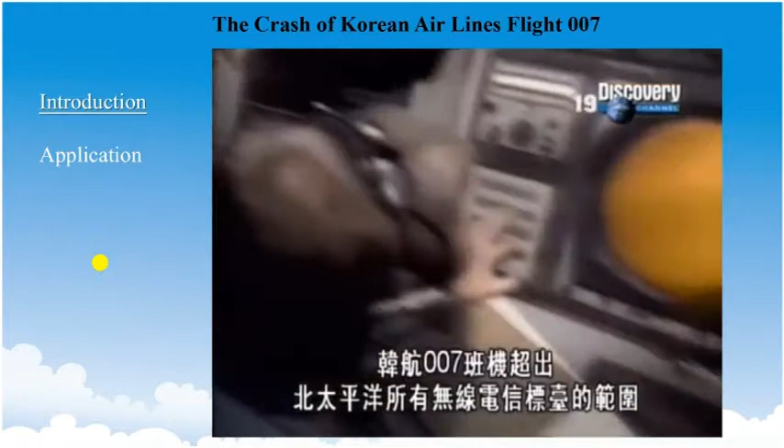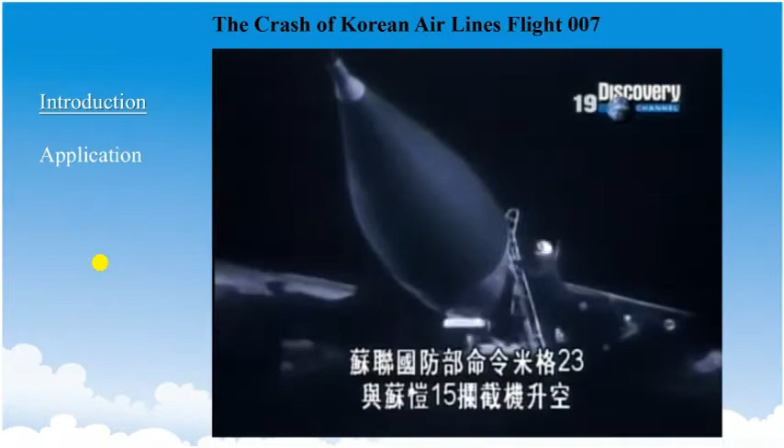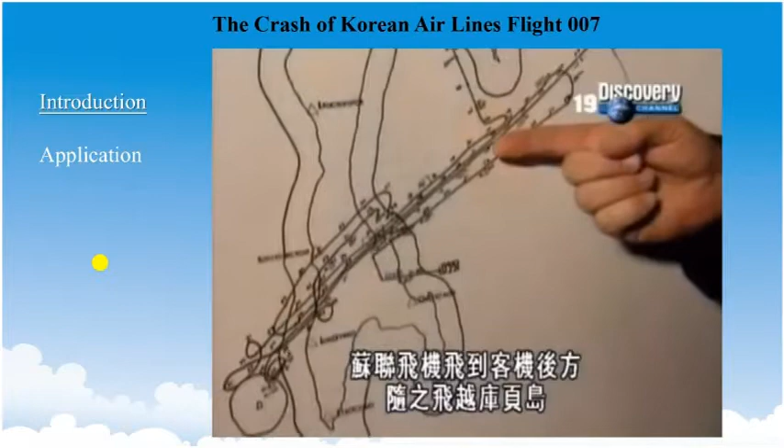So I think the video is quite clear to understand. Maybe it is the end of the presentation. Thank you. No, I'm just kidding. I will start to tell you the whole process of the event.

This event happened during the Cold War. We know that there existed a weird phenomenon between the Soviet Union and the USA at that time, which is the reason that caused this tragedy. In 1983, Korean aircraft 007 was on its way from New York to Seoul, but it deviated from the original scheduled route. When it flew through Soviet airspace, the Soviet Air Force considered it a spy plane from the USA.

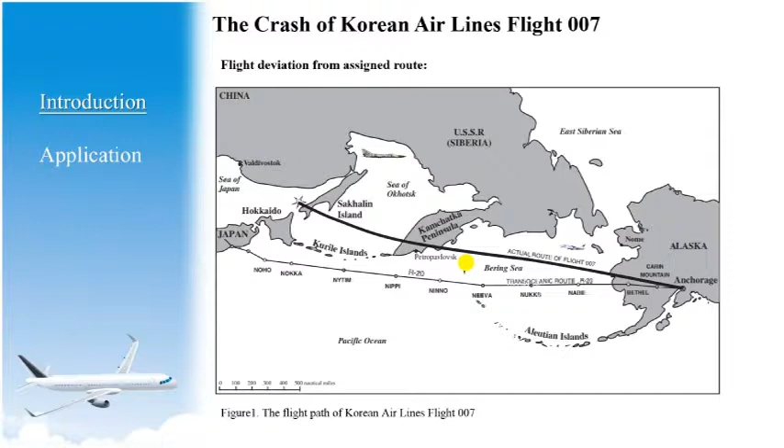So they tried to warn the Korean plane and check its identity, because they wanted to make sure whether the plane belonged to the USA or not. But the Air Force didn't get any response from the Korean plane at that time. Finally, they confirmed it was a spy plane and shot it down.

From the video and the picture just mentioned, we can know that the plane deviated from the original route by more than 7.5 miles. For precise numbers, it deviated from a 220 degrees southwest direction to 245 degrees, which caused it to fly through Soviet airspace.

So why didn't they notice this big problem? We know that every plane is equipped with an inertial navigation system. What's the main reason that caused this tragedy?

The inertial navigation system is a high precision system, including 3 separate computers connected to a precision gyro stabilization platform. Each movement of the aircraft is sensed by a gyro, and each of the 3 computers calculates separately, then corresponds to the change in latitude and longitude. These 3 computers constantly check against each other to ensure that their calculations are consistent, so the system provides a correction function and accurately locates the actual position.

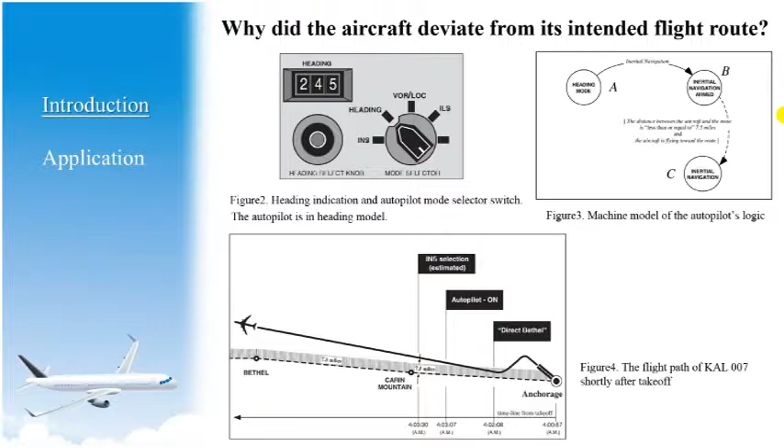It means it's already too late. So the first condition is wrong. It may cause calculation errors.

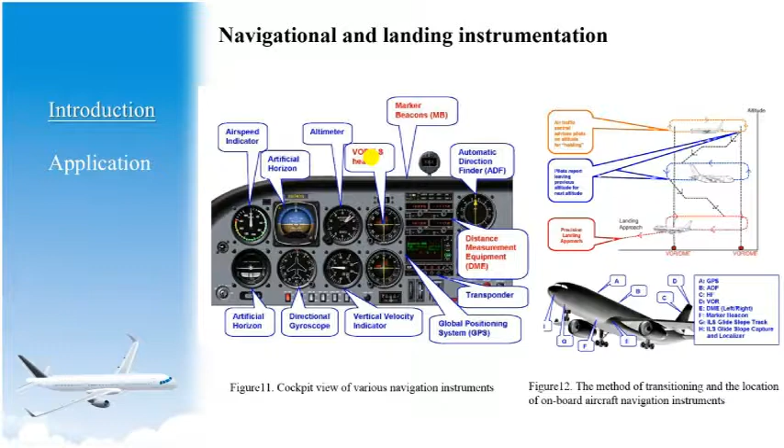It's really complex. And how about the inertial navigation system? I think everybody knows this very well - it provides the pilot with precision navigation data referenced to latitude and longitude.

Accelerometers and gyros will calculate the linear degrees of freedom and velocities, measuring the movement in the 3 rotational degrees of freedom to form the inertial navigation system. There are 3 linear degrees of freedom, like X, Y, and Z, to specify positions.

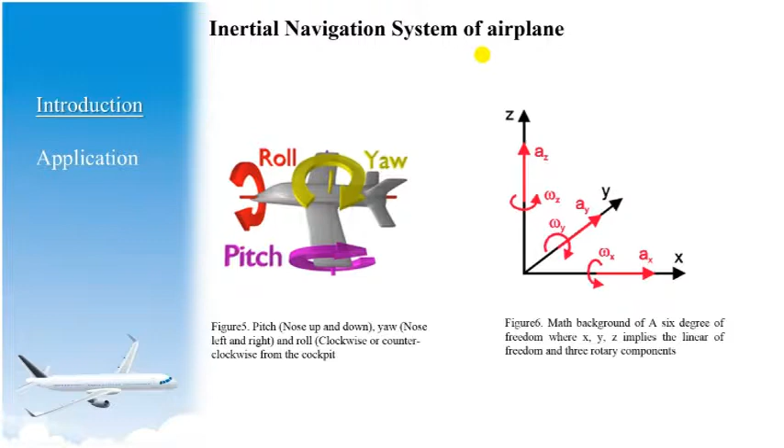There are 3 angular degrees of freedom - pitch, yaw, and roll - to measure the attitude, at different angles.

In the inertial navigation system, you use a gyroscope rotating at high speed, because the gyroscope has large inertia and is not easily changed by the movement of the aircraft. We know that when the aircraft is flying, there may be some big movements that affect the position result. You can imagine it as the same as a reference point in space, and then calculate the current position of the aircraft.

It is also an autonomous system that does not require operating ground stations. So that's the special feature of it.

Let's talk about the INS. We know the INS consists of the IMU and instruments, both electronics and navigation computers, to calculate gravitations and accelerations. The IMU typically contains 3 orthogonal ring laser gyroscopes and 3 orthogonal accelerometers to measure angular velocity and linear accelerations respectively. These computers also integrate the net acceleration to maintain an estimate of the airplane's position.

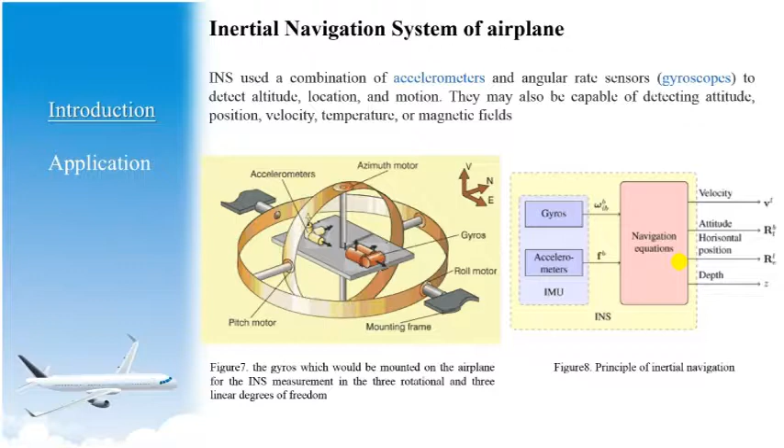The next part is about the sensors. As we can see, there are 2 different sensors: one is the accelerometer, and the other is the ring laser gyroscope.

The accelerometer can detect the magnitude and direction of proper acceleration as a vector quantity, and it can also be used to sense orientation because of the direction of weight change. However, the other one, the RLG, consists of a ring laser having 2 independent counter-propagating resonant modes over the same path.

So the difference in frequencies is used to detect the rotation. They mainly focus on different aspects.

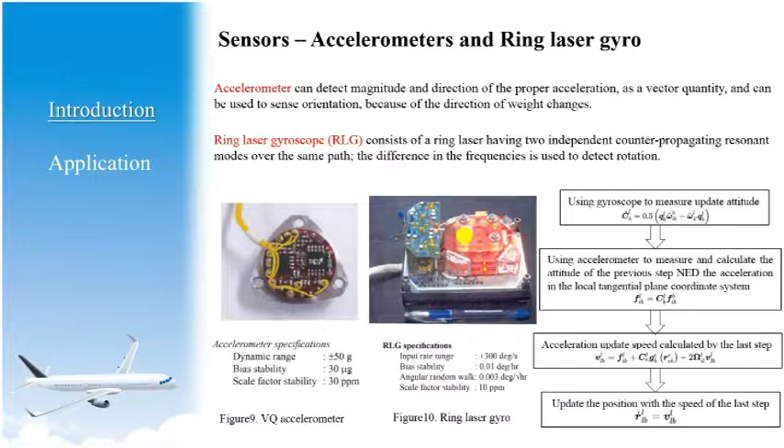So then we use the acceleration to update the velocity from the previous step to get the attitude, speed, and position of the aircraft.

This is why the very high frequency method is used for positioning, which can avoid obstacles on the ground or other signal interference.

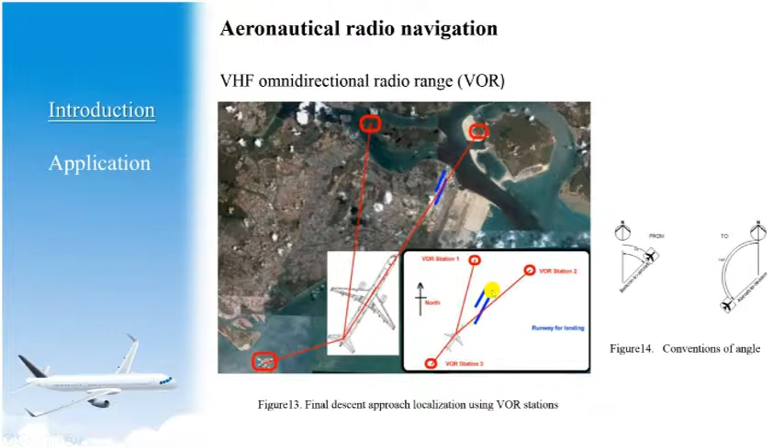For the final part of the introduction, the ILS is the landing system. It's easy to understand: the ILS sends radio signals and evaluates the aircraft's heading, speed, and ground altitude to determine a better landing route, returning this information to the pilots so they know the details and achieve better landing performance.

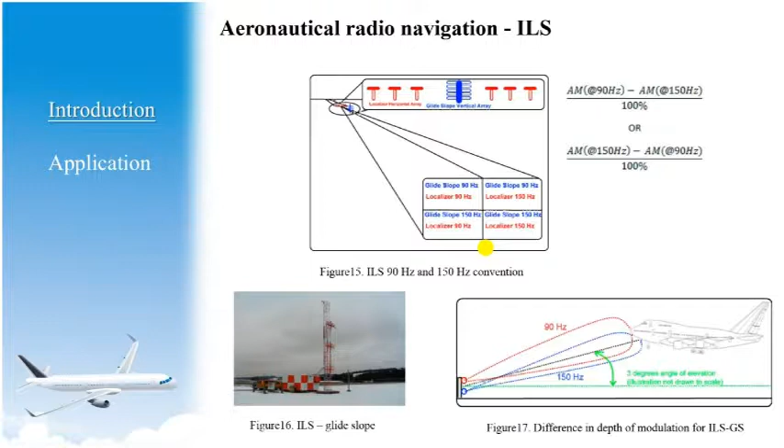Applications. In this part, we introduce the INS systems applied on the aircraft through virtual flight. We divided our application into 3 main parts. The first part introduces what the air crew need to do or focus on when the aircraft is taking off.

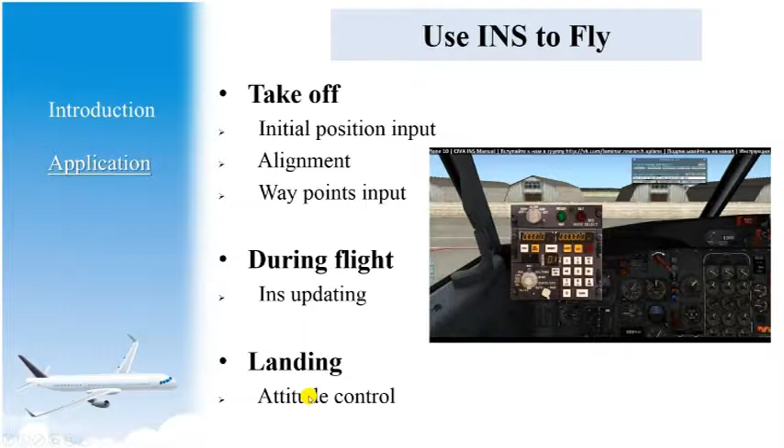The second part covers when the aircraft is during flight, they may face problems or be affected by environmental factors, so what should they do. In the final part, we introduce the landing, and the tips they need to focus on or care about.

The first one, initial position input. Before taking off, the first step is to input the initial position in order to start the INS systems. Just like when you're playing a game, there is a start point in the game—it's the same meaning. So it's a very important part before flying; you have to set the initial position input.

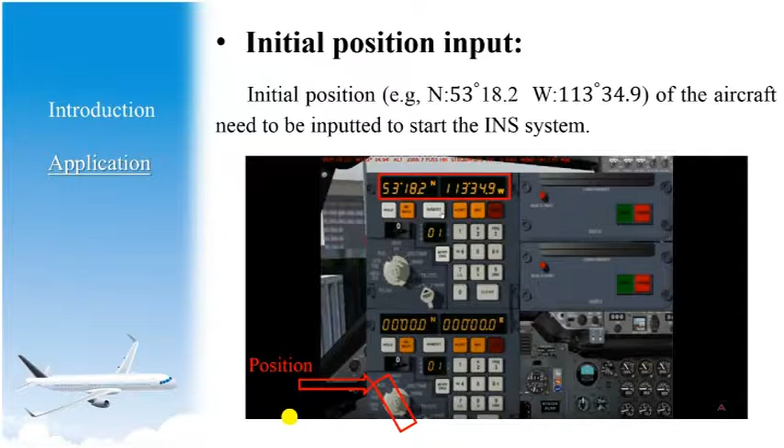Alignment. This function is just to make sure there's a relationship between the INS body frame and the local level. Also, you have to be sure that all of the engines are off.

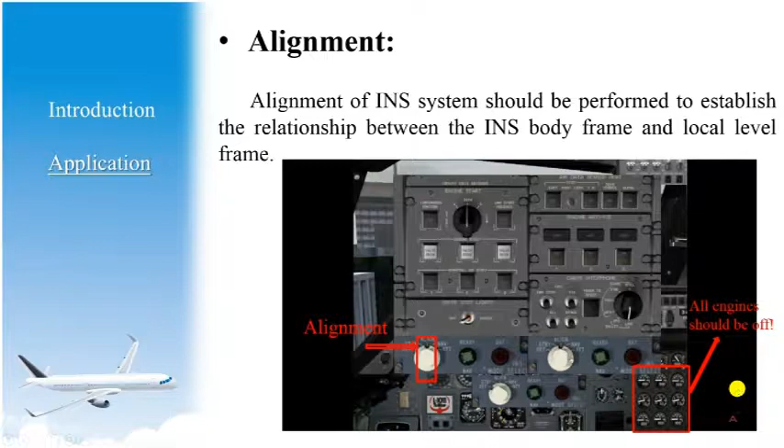Alignment performance index. This is usually used to evaluate the alignment results of the INS before taking off. The range of the performance index is from 0 to 9. We can imagine the performance index like the error of the alignment—a higher number means lower accuracy, and a lower number means higher accuracy.

As shown in the picture, there are 2 numbers: the left one means the PI index is 9 at that moment, and the other side is 5, meaning the required PI. When the left one decreases to 5 or under—maybe 4, 3, 2, 1—it means we can do the next step before taking off.

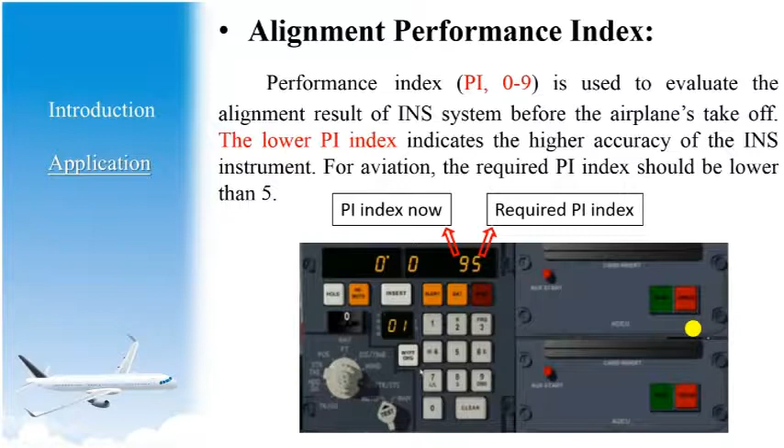Final step before taking off: waypoint input. After doing the alignment performance index, the final step is waypoint input. The aircrew need to input the longitude and latitude of the destination, just like setting a course, a goal that we have to reach.

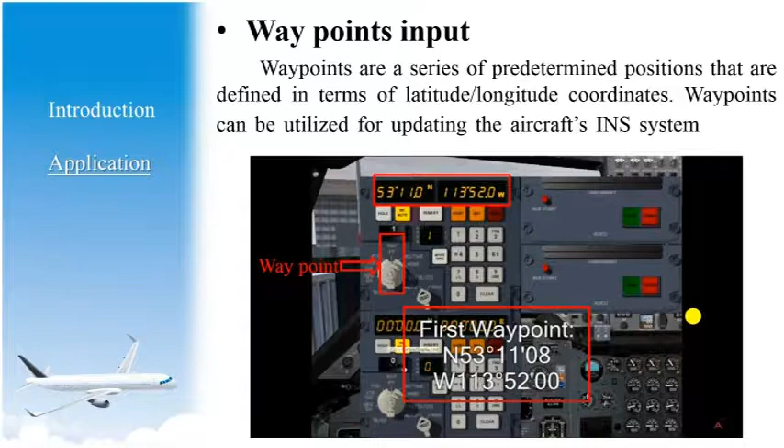This is also an important part during the flight—why it's important, I'll tell you later. INS updating: when they are flying in the sky, they may face problems, like the PI index increasing during the flight, possibly affected by environmental factors or other factors.

So what should they do in this moment? The aircrew need to predetermine the waypoint to the INS systems to make sure they are on the right track. As we can see in the pictures, the number increases at that time, then they do the INS updating, and finally the number decreases. This is something they have to do or notice during the flight.

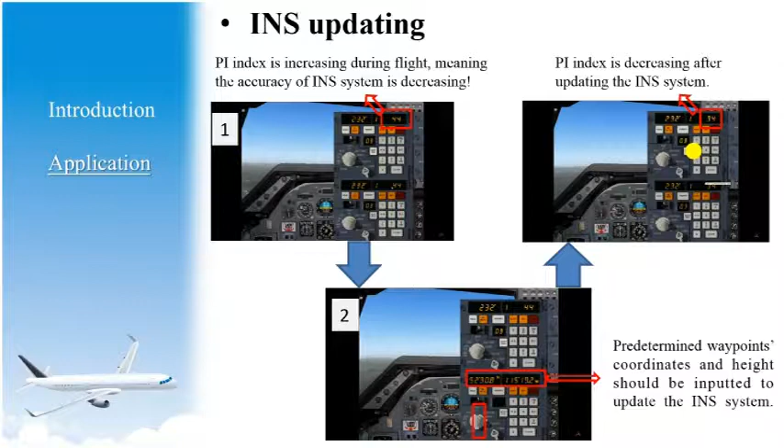Finally, altitude control. This is the final and also important part for the aircrew, because actually many historical crashes happened in these sections. The main reason for this high damage is air turbulence. So in order to cope with air turbulence, there are two conditions they must fit with.

The first one is they have to make sure the engine is off, and the second one is they have to maintain a low speed. I think it's quite easy to imagine why they have to turn the engine off or fly at a low speed.

This makes it easier to cope with air turbulence, and land at a safe angle through the attitude adjustment system. Then they complete the flight.

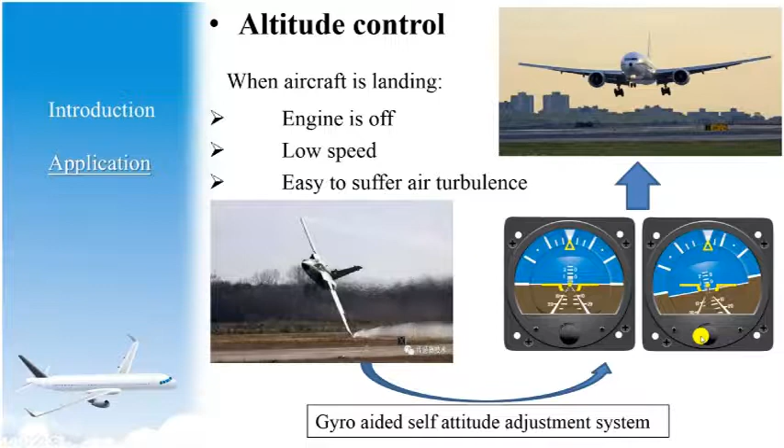Okay, that's a brief introduction about the INS system applied on the aircraft, and I've finished my presentation. Thank you.